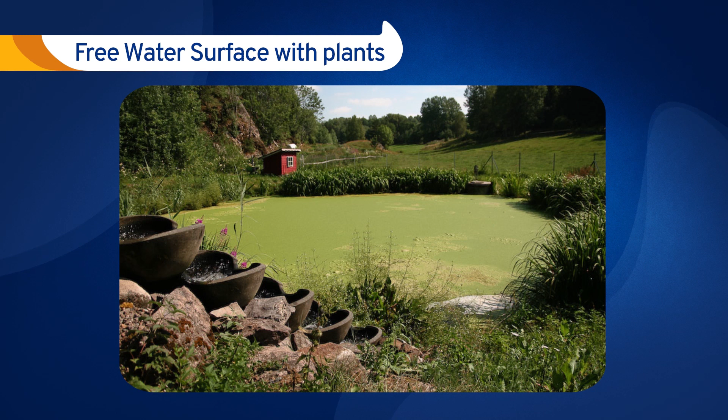There are two major constructed wetland designs. One is called free water surface, with plants such as seen in the photo, and the second is known as subsurface flow systems. Free water surface constructed wetlands are shallow ponds, typically less than 1 meter deep, but they are less efficient in treating water and require large area.

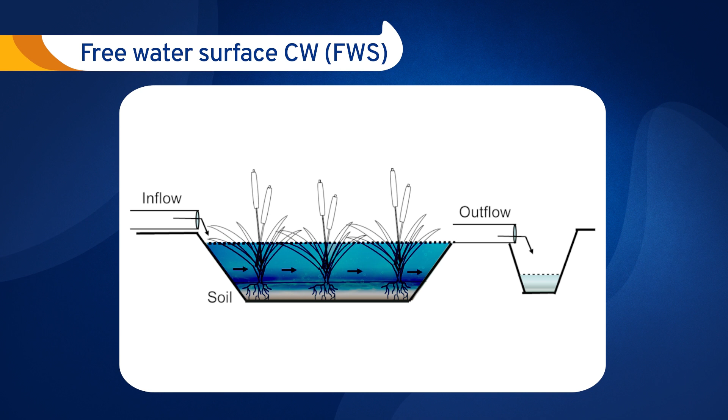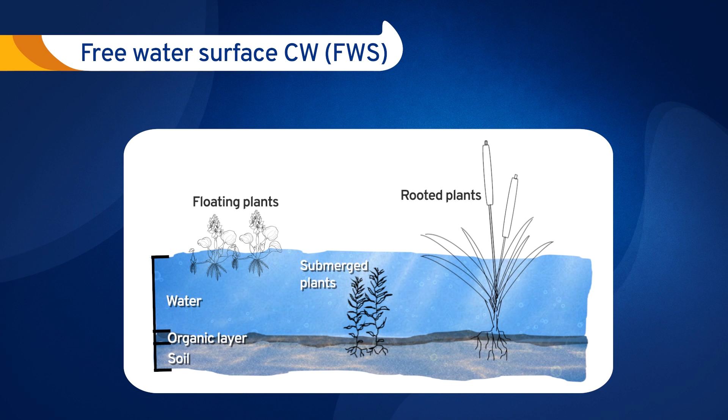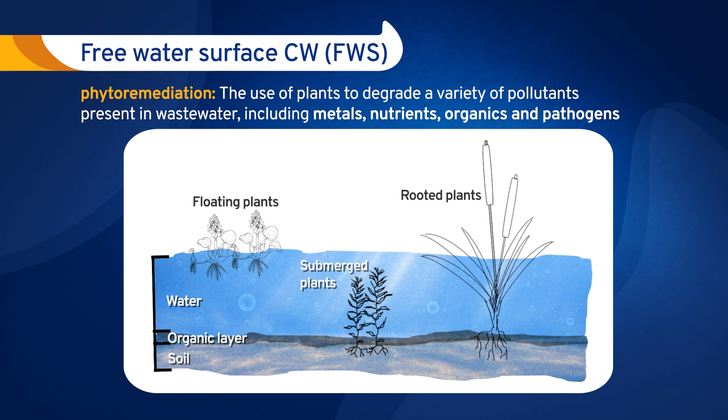The pond bottom contains substrate that supports rooted plants, such as rushes, but other floating or submerged plants are also used for water treatment in a process called phytoremediation. These wetlands often resemble natural flood areas or swamps. Yet, they are quite inefficient in water treatment per unit area. Thus, they are beyond the scope of this course.

Subsurface flow constructed wetlands are more abundant and have two main designs: horizontal flow, as seen here, and vertical flow, as will be shortly discussed. Typically, an on-site horizontal flow wetland has a length to width ratio of around 0.6 and is about 0.6 up to 1 meter deep. In this wetland, water enters via a high porosity inlet zone, where the larger suspended material is dropped.

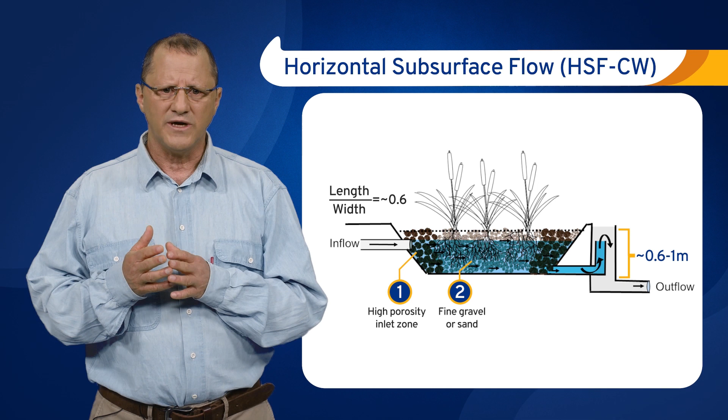The second stage contains more fine gravel or sand media, where most of the microbial activity takes place. This activity can be aerobic and/or anaerobic. While the role played by plants in these systems is still controversial, they are mostly considered to contribute to the water treatment through assimilation of pollutants, gas exchange, enhanced microbial activity near the root zone, and through moderating the water flow and temperature. The plants are also aesthetically pleasing and may reduce bad odors from the wetlands. The water exits the system via an outlet zone, which contains larger porous media.

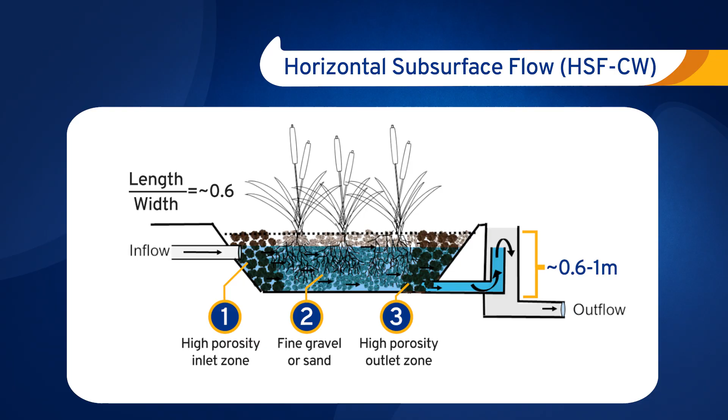In summary, in constructed wetlands, wastewater moves horizontally for 2 to 6 days through the gravel and underneath the surface. The predominant treatment mechanisms are physical filtration, sedimentation, and biological degradation. So how do we actually approximate the area required for a horizontal subsurface constructed wetland?

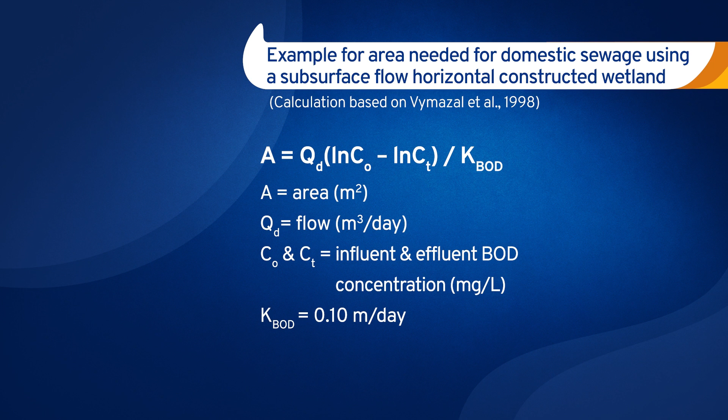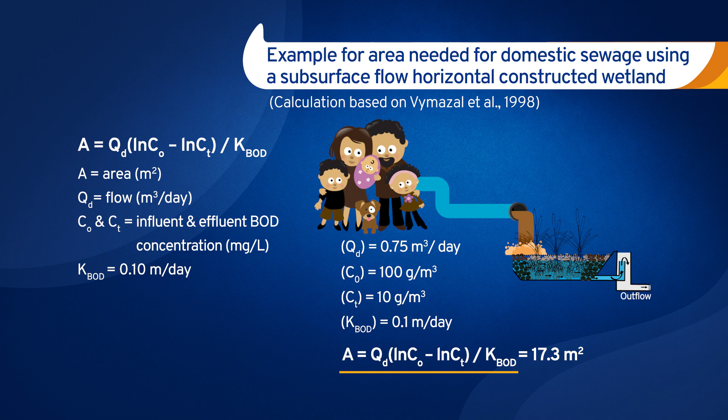Let's, for example, estimate the area needed for an on-site wetland to remove BOD to the regulatory levels, assuming a 5-person family that produces 0.15 cubic meter per person per day with an inlet C0 concentration of 100 milligram per liter. The regulation suggests that 10 milligram per liter BOD is required before the treated water can be reused for irrigation. Thus, the effluent concentration CT should equal 10 milligram per liter. Based on the literature, the reaction rate for BOD removal is 0.1 meter per day. Let me just tell you that if you correctly use the equation on the slide, the estimated area would be 17.3 square meters, and I suggest that you check it yourself.

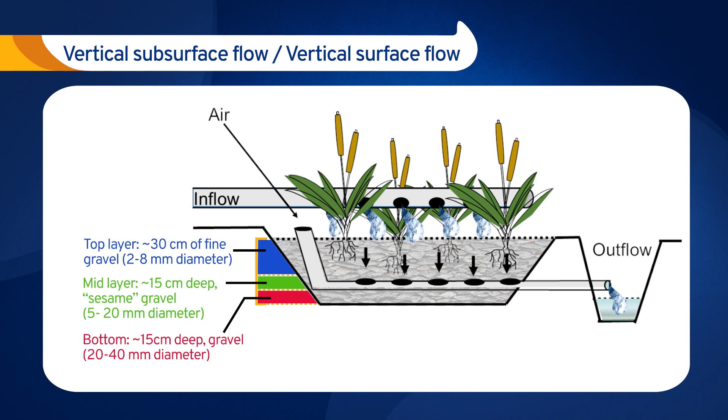The latter enhances the water quality and the overall wetland's efficiency to degrade organic matter at much shorter hydraulic retention time. Therefore, the dimensions of vertical flow wetlands are significantly smaller than those of horizontal flow ones. In the vertical flow constructed wetland, ammonia oxidation is efficient, but removal of nitrogen via denitrification is less efficient.

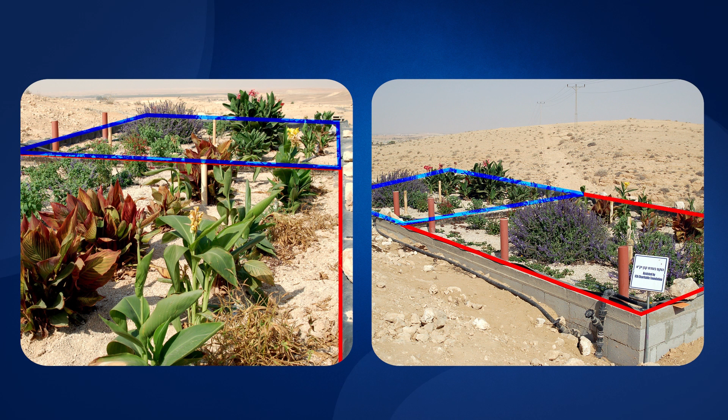Here you can see an example of an on-site vertical flow system in a small farm, treating about 6 cubic meters of farm wastewater per day. It can be seen that the wetland is divided into 2 beds, or compartments. Each bed operates for several days, after which the water is diverted to the other bed. The resting bed is better aerated during this period, and absorbed compounds are further degraded. This staggered operation significantly enhances the system's efficiency.

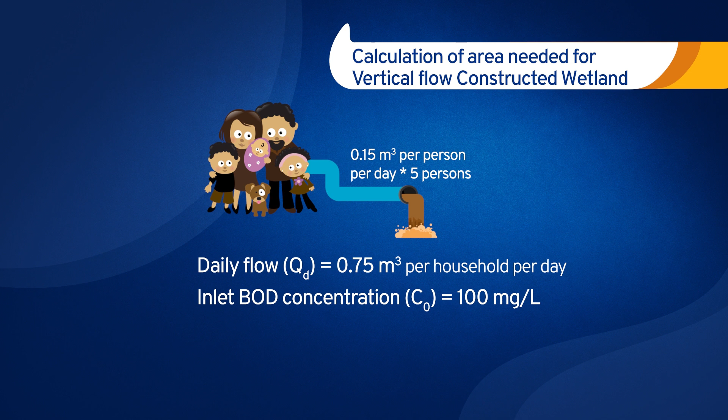While reactor models are based on mass balance analysis, often small-scale reactors are designed based on a rule of thumb and practical experience, such as in the following example for the design of vertical flow wetlands in temperate or warm regions. Let us use the same example of the horizontal flow constructed wetland and see the required dimensions. As you may remember, we assumed a 5-person family that produces 0.15 cubic meter per person per day, with an inlet concentration of 100 milligram per liter and an outlet concentration of 10 milligram per liter.

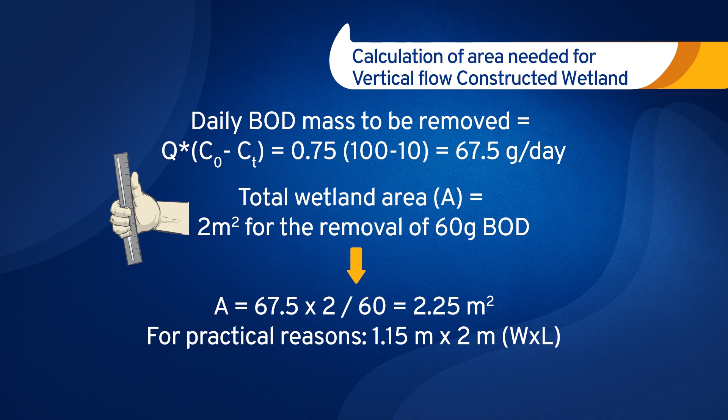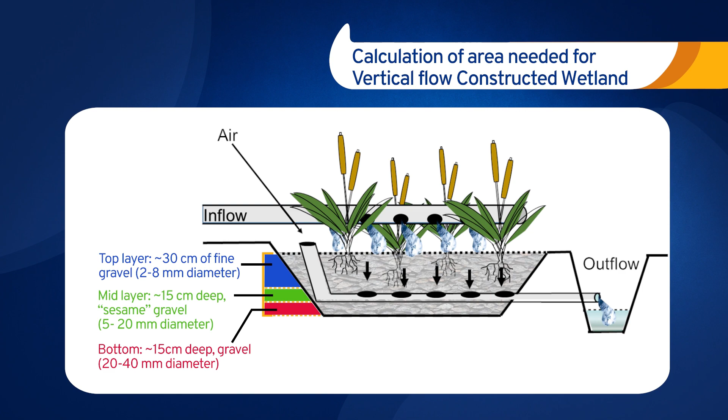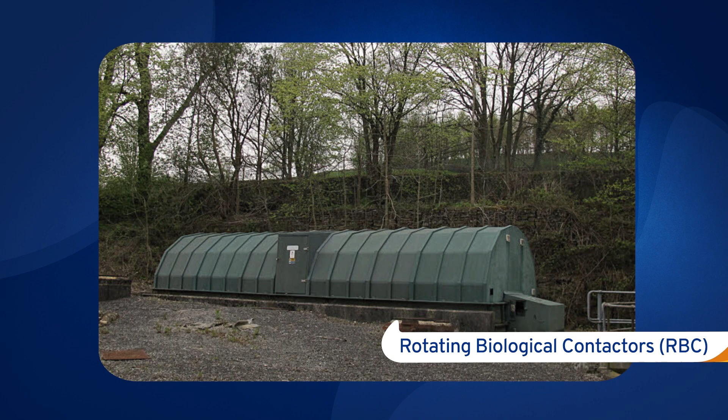Going through the calculation, the estimated area for the vertical flow constructed wetland is 2.25 square meters, significantly smaller than the horizontal flow one. As you can also see, the bed filter structure is a bit different than in the horizontal flow wetland, but the principles are the same, and the bed is used to treat the wastewater by physical, chemical, and biological mechanisms. Before we move on, I just wanted to remind you all that constructed wetlands were given as an example, but there are several other solutions, such as rotating biological contactors, or RBC, moving bed bioreactors, and others. Yet, these are beyond the scope of this course.